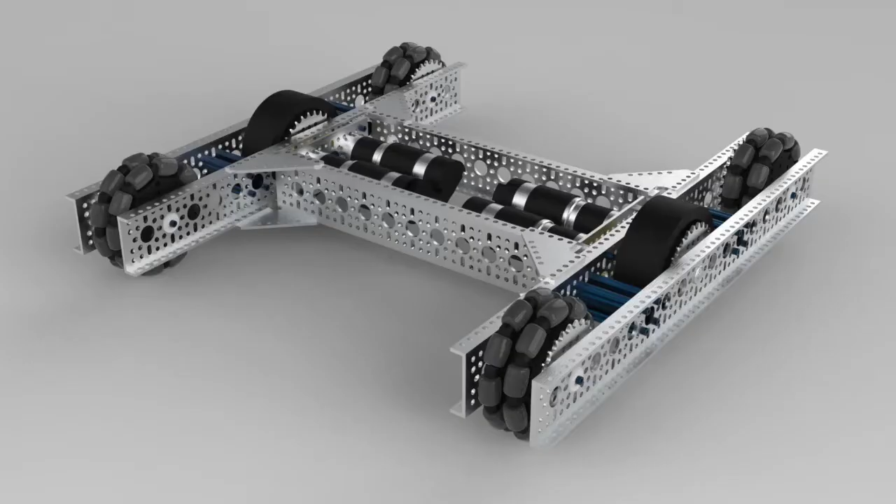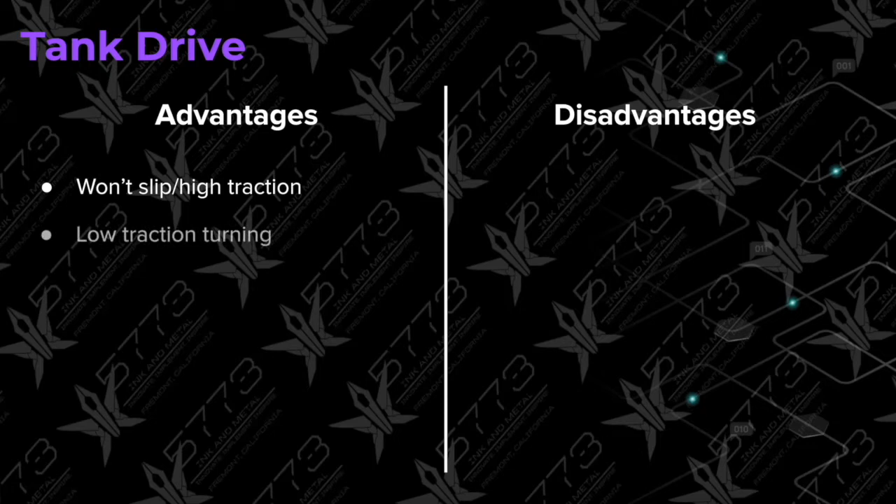So to begin with, the first type of drivetrain we're going to talk about is the tank drive. Essentially, each of the ones we discuss will have some pros and cons. Some pros of the tank drive are that it won't slip when pushed, it has high traction when moving and low traction turning, and it's also good for getting over obstacles when your robot is moving. This works because of its high pushing power.

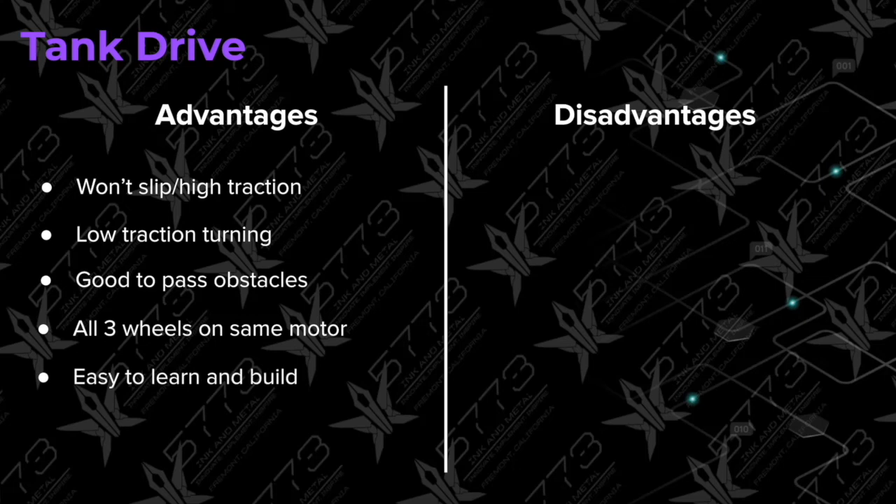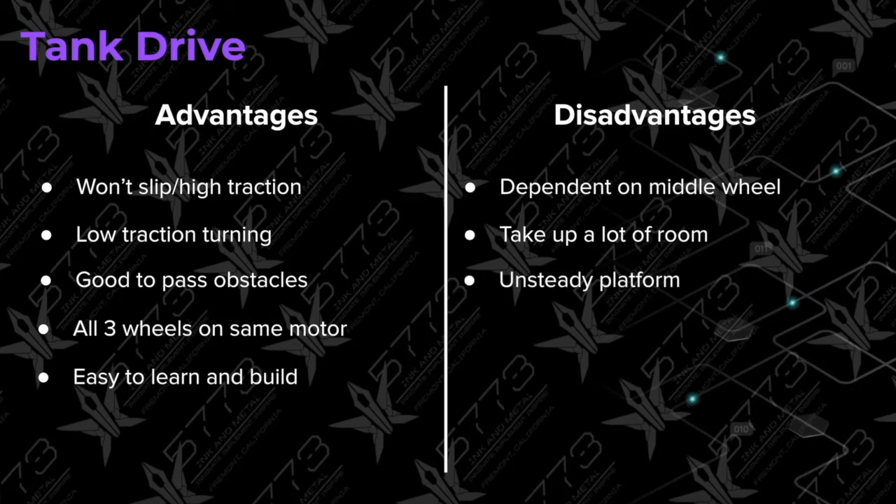Also, all three wheels are on the same motor, meaning that if the belt pops off, you still have control of the center wheel, so you won't lose complete control of the robot if anything happens to the belts. It's also easy to learn, build, and it's very versatile. But it also has some cons: if the middle wheel breaks, the robot can't move, it can't strafe properly, it takes up a lot of room on the sides, and it rocks back and forth with an unsteady platform because of the room around it.

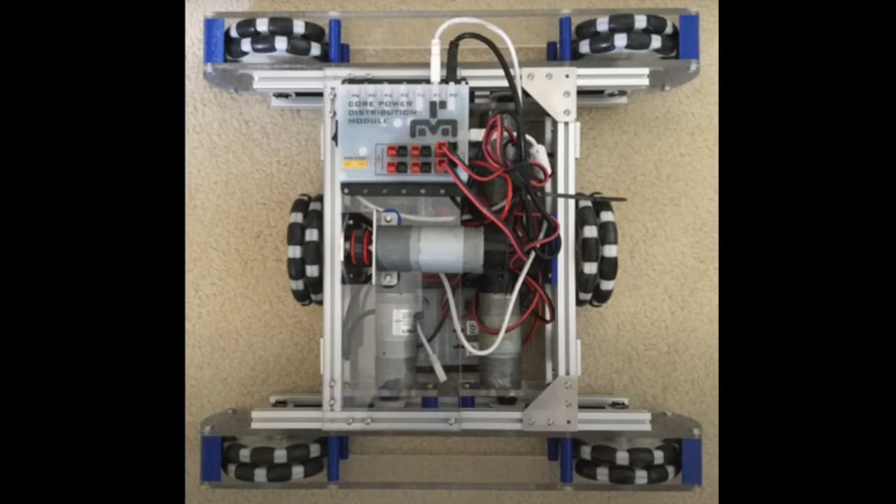Now for our second type of drivetrain, we have H drives, which also have pros and cons. Some pros of H drives are that they have 5 motors instead of 4, and they use omni wheels and a center wheel to strafe without turning. The strafes are in a straight line with no drift, and the full power moves it forward with 4 motors, which is a lot of power to move the robot over a distance.

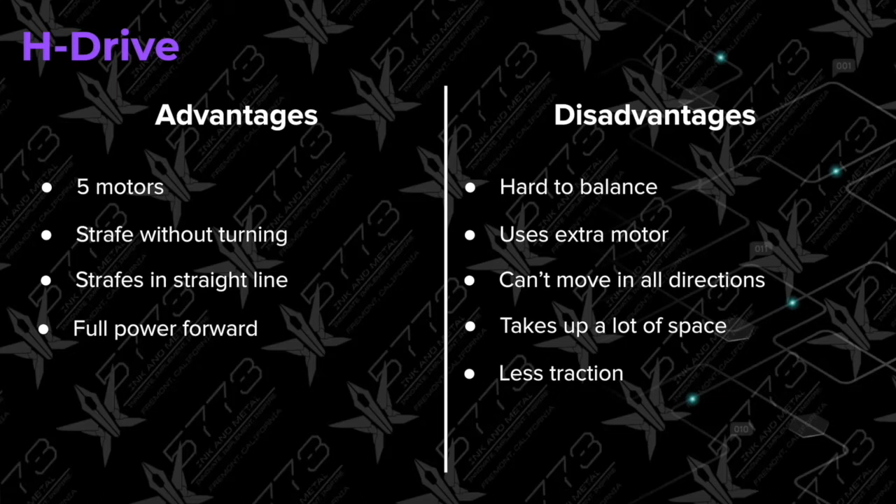Following up on this, there are the X drivetrains, which have pros such as being really simple to drive. They can strafe, they're very agile, and with that agile feature they are very smooth to drive and switch directions really easily. But even though it moves smoothly, it has cons, such as being pushed really easily, and if the motors are off, the strafing will be off as well. This all comes together to reduce power in all directions.

So there's less pushing force and it's very low, so it can't clear all the obstacles in the way. And since the wheels act in pairs, if one of the wheels breaks, the robot might not perform well. Sometimes it will rotate a lot when driving because of the easy movement and smooth driving, so the structure on the bottom won't be as strong.

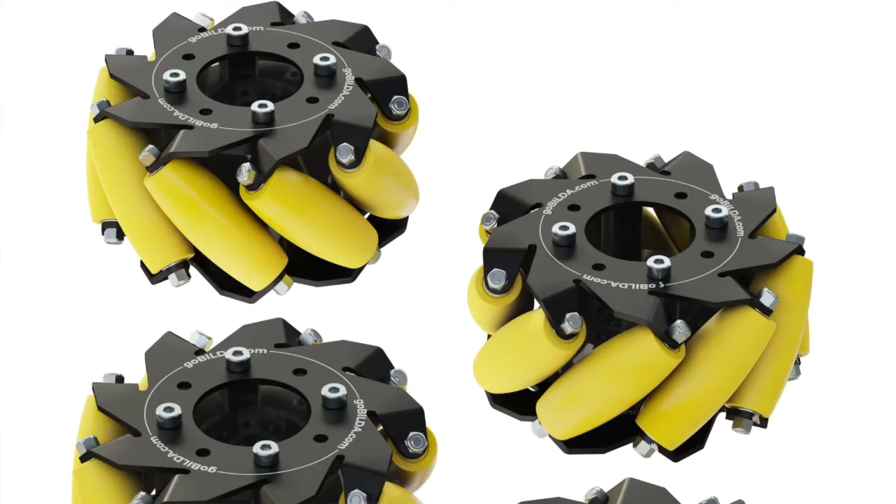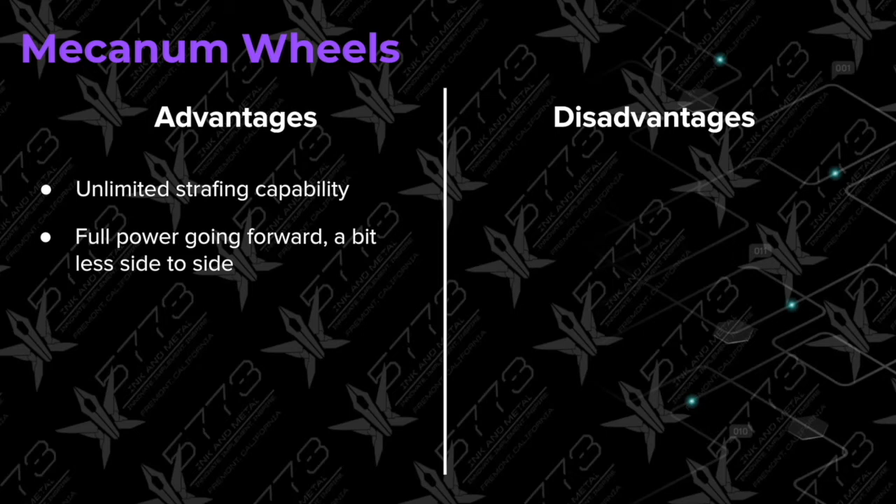This follows up with another drivetrain, mecanum wheels. These have the pros of unlimited strafing capability, full power going forward, a bit less side to side, but they have more room on the inside and more pushing power than the X drives we just discussed. Even though they have these pros, some cons are that this drive sometimes drifts while strafing, so it's pushable, and it's hard to get traction when clearing an obstacle.

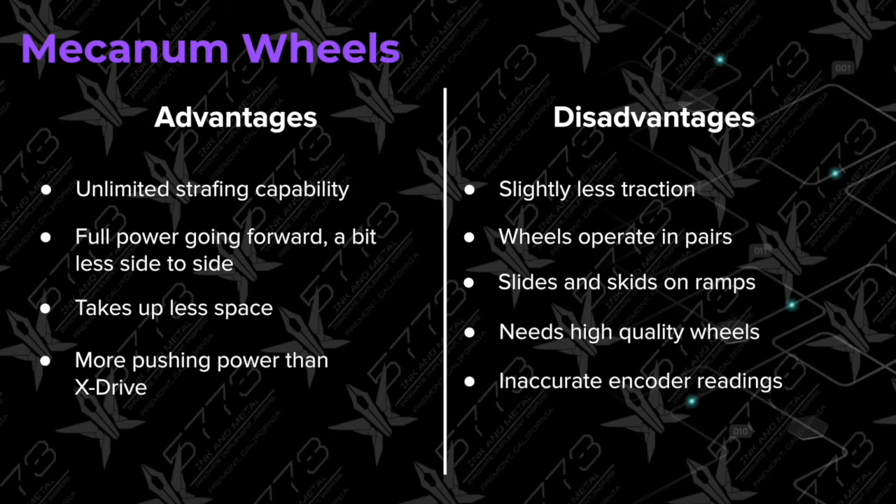So wheels operate in pairs - if one breaks, you can't move right, and it slides and skids on ramps when moving. If a motor breaks, the robot doesn't work well, and it usually slides to the side. So it really needs good wheels, and it can't get accurate readings from the encoders for auto because of this smooth movement that doesn't stay intact and in place.

Now we come to our last type of drive, which is the swerve drive. These drives can strafe and rotate at the same time. They have a lot of traction, so they can push really well, and they're not too pushable at the same time, meaning they won't lose focus or stay out of place. They only use four corners, so they're really good at clearing obstacles and have more power in certain directions than the X and mecanum wheels.

With this comes some cons, and it's really risky with these, just for the fact that it's hard to design and make, and it needs powerful servos, or else it will burn out many of the servos. So it needs brushless servos, and mostly it needs to be custom, higher off the ground, more complex, and there are more parts to break when using these, so you have to replace or change up the design because of the solid structure they have.

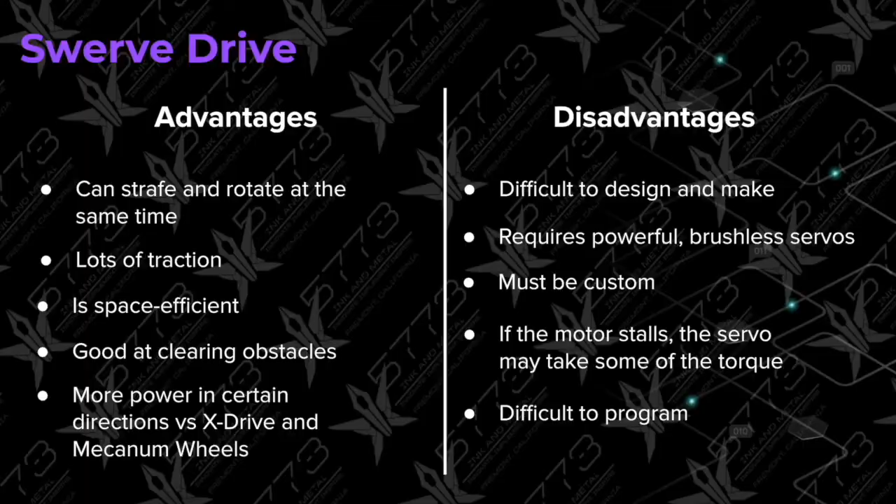If the motor stalls, the servo may take some of the torque, and it's harder to learn how to drive with all these problems. There's an observable lag of the wheels turning, making it even harder to program overall. It may sink into the foam tiles and needs powerful servos, so the servo braking is a really bad aspect of this whole process.

So when your team chooses a drivetrain, you want to make sure you choose one that fits your team's needs. This depends on a few factors, one being money, so it's really important to spend your finances according to how much you have, essentially creating a budget for yourself beforehand on how much you think you can spend on this component of the robot.

This ties into a second factor, which is time. Time is something you should really address within your process of choosing a drivetrain, because depending on how much time you have left until a competition, you might want to invest in a more expensive one, or one that's easier to work with, so it doesn't delay your work time.

According to your resources available is another factor, so you want to check if you have the resources needed to design and make these drives. A larger complexity, and possibly also needing more time to program a component, might lead to difficulties along the way, just in time constraints and the resources you have.

All these also tie in with a common factor, which is skill level. This is crucial because it essentially refers to a person's knowledge on a particular subject, and attributes to their level of experience in using this component or anything they're building. For example, with mecanum wheels, since it's hard to get traction when clearing an obstacle, it would benefit a team to learn or acquire basic knowledge, or choose drivetrains that match their skill level so they can easily use them.